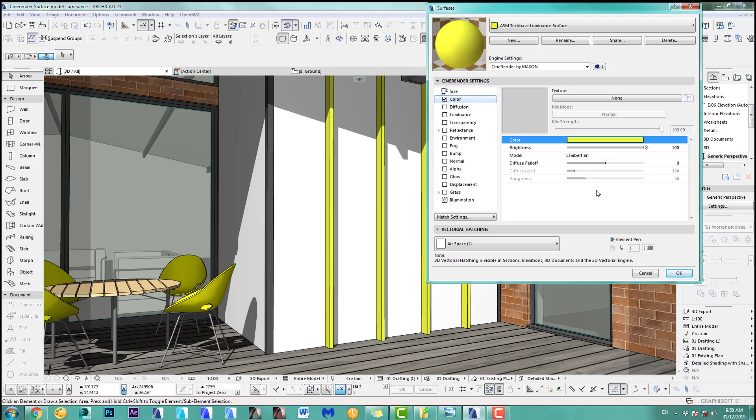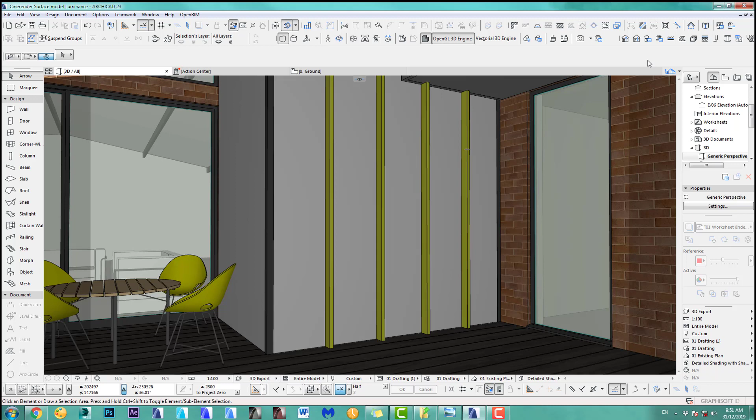If I go now and render this up, what I do is make this quite dark. Let's go -5, so that means the sun has gone down. Well, it's sort of still coming up, but let's make it really down, -10. Right, so it's pretty dark now. If I render this up, obviously everything will look a bit dark, and we will add the luminance channel to those yellow posts I have. I can stop this. You see, it's all dark, you can hardly see anything.

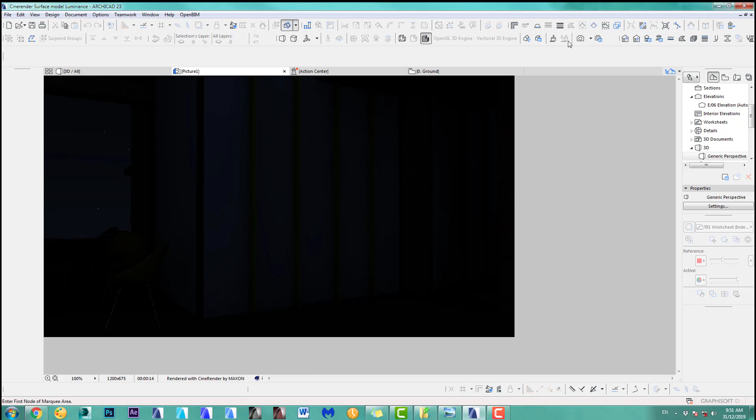So the first thing you do before using the luminance channel is increase the brightness here of the color. Let's put this at 300. See how it starts to really brighten out, and we render again. You can see this slowly coming sort of, well, let's call it to life. I stopped it right there. If I want them even brighter, just increase here. Let's make it 1000 just to see what happens. Okay, and we render up again.

So they're quite bright now, but obviously they don't produce any light. There's nothing, you see, everything else is pretty pitch black. So this is where the luminance channel comes in.

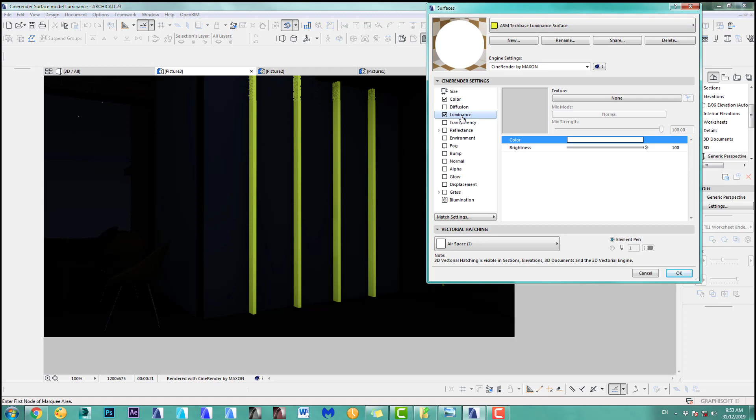If I go back here and click on the luminance channel, let's decrease this again. Let's put it back to 500. Okay, so I've got the luminance channel turned on, that's all I did for now. I click OK and render again. Now as you can see, still nothing happens.

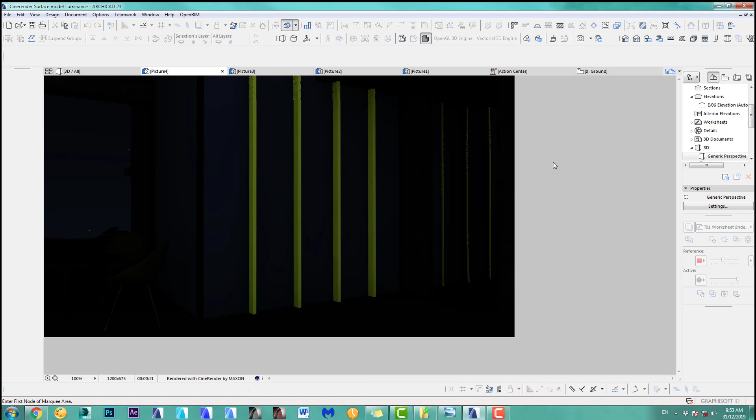I wanted to show you this because it happens a lot when you do stuff and think, oh, I did all this and it doesn't seem to work. The reason is you need to turn on a setting in your render settings. You go to detailed settings, light adjustment, and down here you need to tick this, and let's put this on 100. Let's close that off and render up again.

So what it does is CineRender now calculates the actual luminance channel. As you can see already, it really gives you some light areas. It really produces light at the wall. Now I stop this here again.

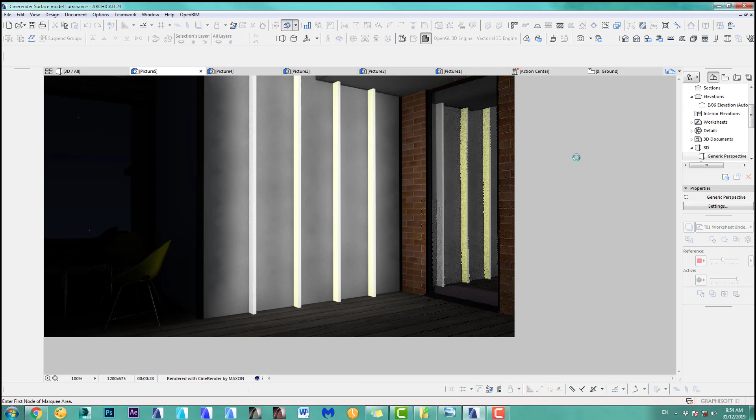And we go back to our surface. So we've got color here, and you can see that because this is yellow, there's a slight yellow tint, but the luminance is quite bright for this one. Now if you want to match the color, you've got to go here and make this yellow too. Let's go yellow and hit OK. So now what you see on the wall here will also be a bit yellowish.

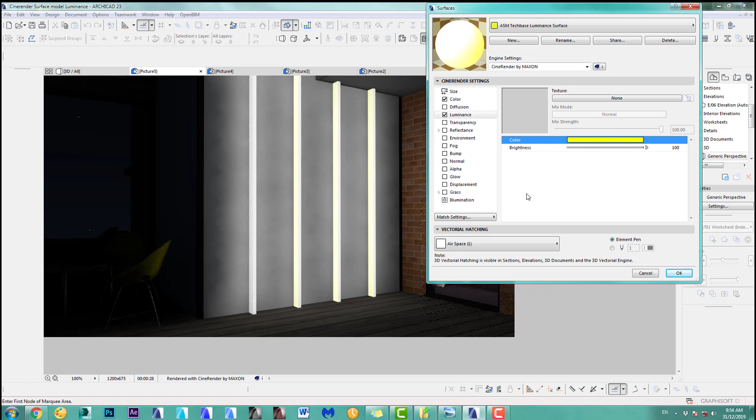Let's do that again. Well, it's more than a bit yellowish, but you understand what's happening here. Let's stop this. So this way you can adjust this. You can see, okay, this is a bit much, it doesn't look right at the wall. So let's go back, and now we change the luminance brightness. Let's move it down to 33, so that's a third of 100. And we render this up again.

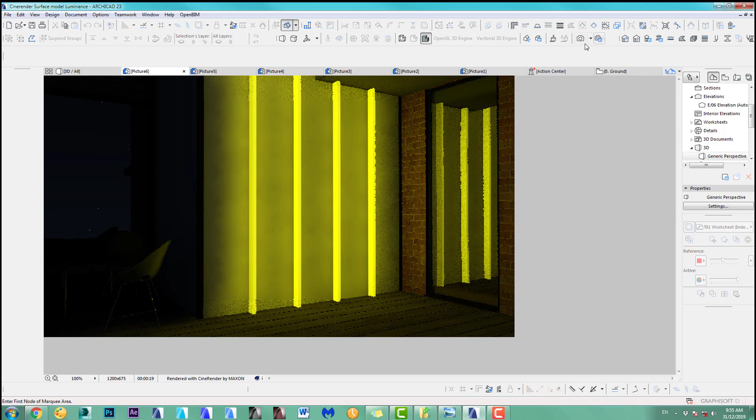Okay, but I want to make them look more like a neon light. So I go back in here, and to do this I increase the color brightness again, because I don't want to spread it out too far. So if I increase the color here to 1000 and render this up again, there you go. It looks a lot more like a neon light now, and the spread of the light is still the same, not much there, just a little bit.

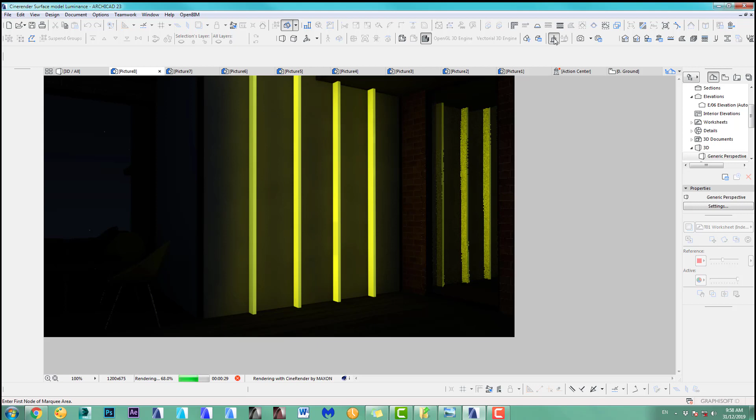That's the way you then increase this. You can increase this even more, make it 5000 to make it really look like a neon light. But the next bit is, let's go back to our luminance. So we've got this on brightness 33, let's put it back to 50.

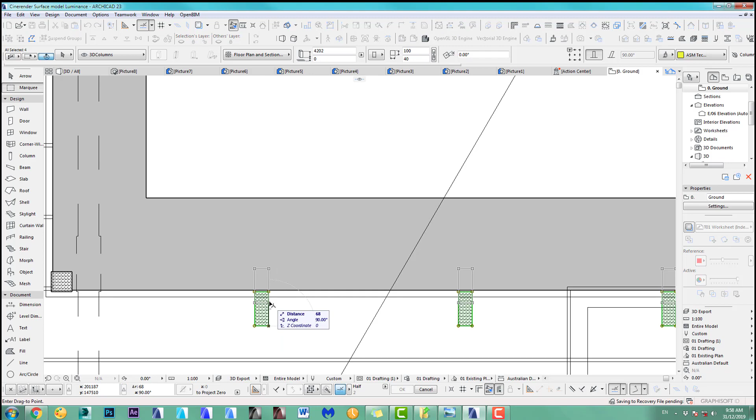Before I do this, I want to go to my 2D drawing here. Let's just move them in a bit, because I don't want to spread out too far the area light that it produces. So let's render this up.

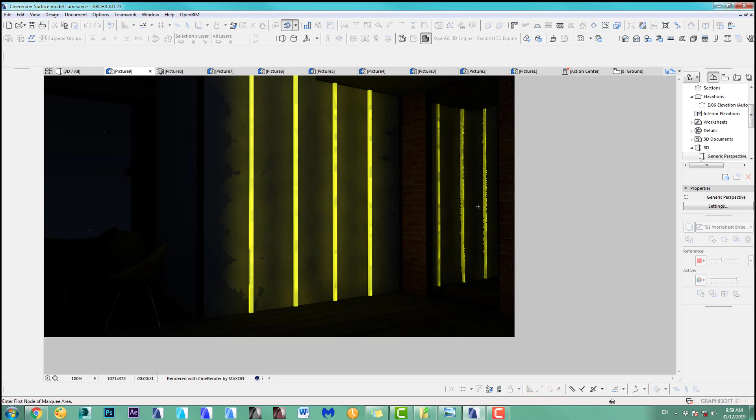You can see slowly what happened here, because I moved it towards the wall, you see the area light here, so this is getting a bit black here. I've got low settings, that's why the rendering settings are quite low. So if I stop this now and we move the sun up a bit, let's make the sun 10, so there's a little bit of light there, and we render up again. There you go. I did this on purpose to see, it's obviously important, depending on where the sun is, the setting of your neon light has to be adjusted.

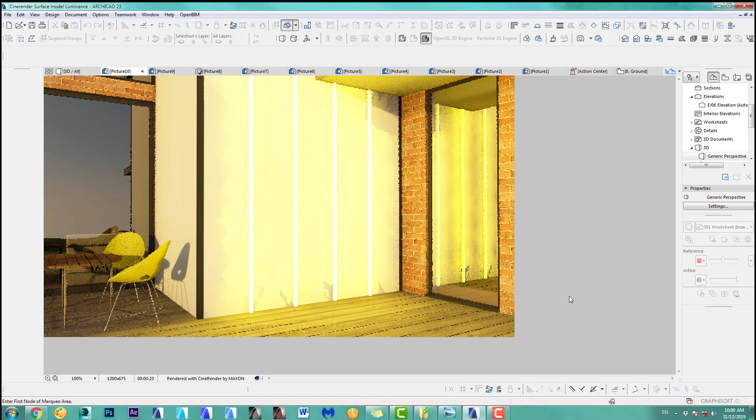Okay, so everything with any rendering software, that's what happened. Obviously the sun goes up higher and higher, there's more light, global illumination coming into effect. So obviously the spread of the neon light is way too big now. Before we show a more exciting, better looking image, I adjusted the render settings, put them a little bit higher.

Let's see how that looks now. Okay, this looks much better. You can clearly see the neon lights going down and have a little bit of luminance on the bricks, and I think that's pretty good actually.

So the next part of this series is the transparency channel. See you there.